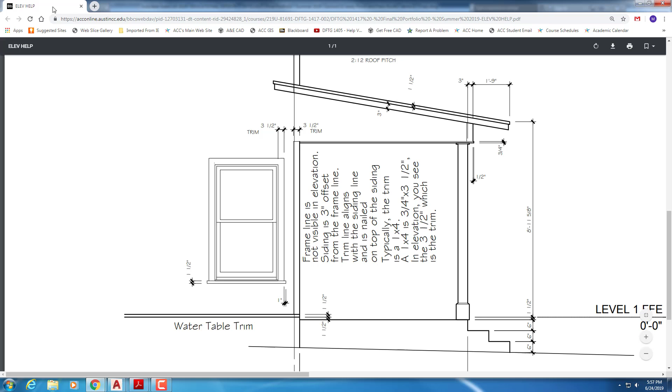The top of it is 1.5 inches. So the porch is 1.5 inches below, the top of the water table trim is 1.5 inches above. All right, so now let's actually draw that.

So instead of starting with the front, we're better off to start on the left side, west side elevation. And it's in this area here. So we're facing the direction, we're kind of drawing where the elevation slopes and all. So if we set this to A-ELEV-DARK,

and we'll set all these to by layer. All right, so from the edge, and this is just a construction line, from the edge of the column here out to, make sure my ortho's on, out to the face of the trim, it's going to be 2 feet.

All right, so we are at the 8'-11, and I think it was 5/8. So that's actually the line in that format thing that we use for the UCS. It's at that same height. So that's where the 2 and 12 would start.

So since the 2 and 12 is a ratio, basically start on top of the line here, come back 12 feet, and this just to construct the diagonal 2 feet up and then close it. That should give us a 2-12 slope. Yeah, X is 12, Y is 2, so that's good.

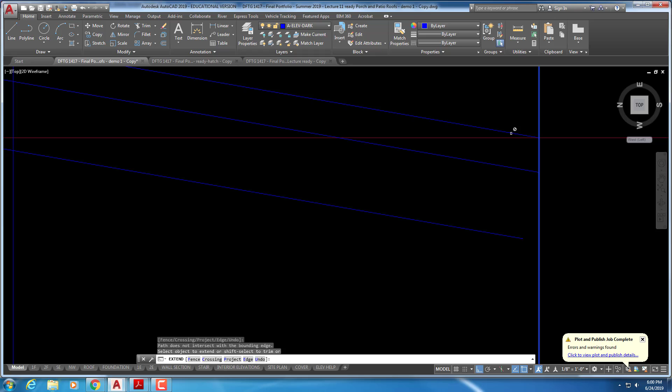So back here, since this is the one out here at the edge, these 4 should connect there, and that should already be connected, and then you would offset it 3/4 of an inch back, as usual, for the roof. And then you would trim that up.

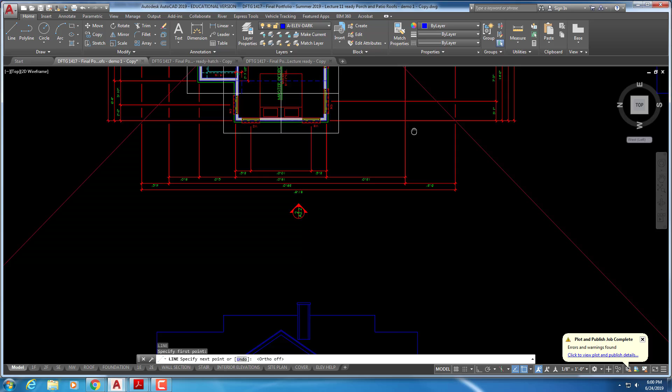Now on the other side, this goes a foot past the framing, but it's actually 1'-3" from the edge of the house, because we have 3 inches of siding out there. So if you project down from where that line went back on the roof plan, which is that foot back from the framing on the roof plan, that's where... can't see it, there it is.

That's where it ends. It's a foot back from the framing on the roof, but because the siding was 3 inches further out, it'll be 1'-3" here. And then we'll come back in another 3/4 of an inch to get the trim and the fascia board there. And then come back and fill it and clean those up. And then trim that.

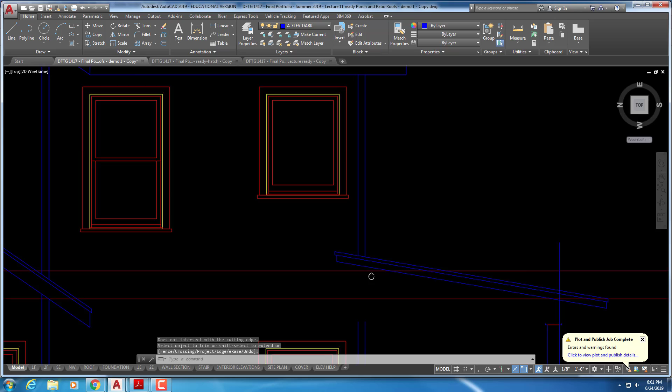Alright, and then this line is going to be trimmed back to the bottom side of the fascia, right on top of the column there, and again, the column sits 1.5 inches below finished floor. And so at the top of the column, right there, you're going to have the line coming across.

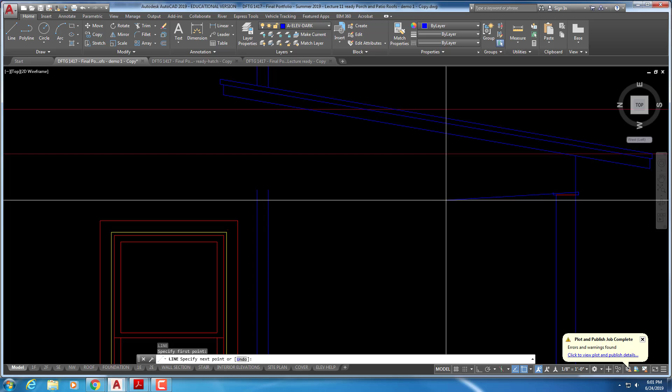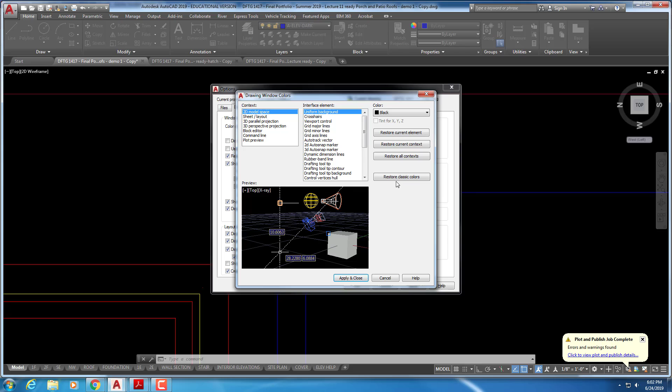I'm beginning to wonder if that's not a black screen. I want to check something real quick. It has nothing to do with what we're doing. I don't know if that made any difference or not.

All right, so start at the top of the column, come back across, and then offset it 3/4 of an inch up. That line's going to come to the back side of the 3.5 inch trim.

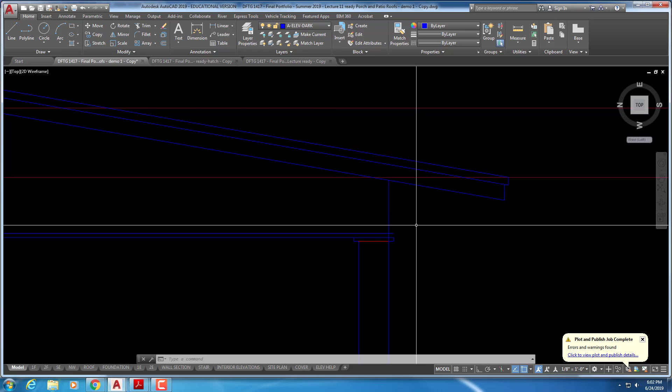So you would just fillet those together. So if this is running into the 3.5 inch trim, it's not going up any further. Over here, this is actually, according to the go-by diagram, coming past the top of the column there, and it's going out the 3 extra inches, like we did on the house for the siding.

This line stops at that 3/4 inch trim. But then at this point, it's showing that it's going 1/2 inch further out. Again, it would have made more sense at 3/4, but they used 1/2 inch, so we'll do that.

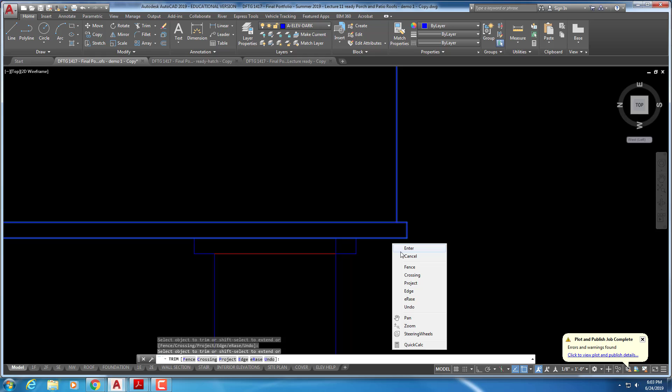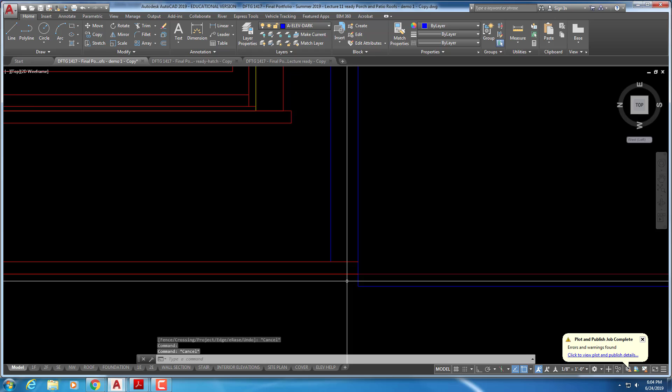And the water table trim, which you probably don't have drawn in, which is on the A elevation light layer, is the bottom of it's at finished floor and the top of it's 1.5 inches above, and the trim runs into it. So then that's that construction.

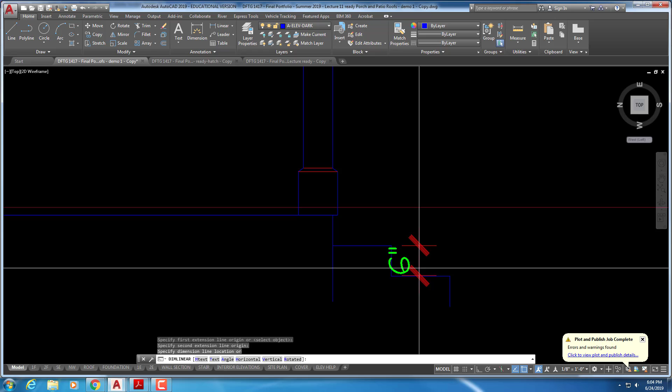As far as the steps go, they're going to be, according to the note on the floor plan, 12 inches deep each. So that means in line with the face of the column here, not with the trim around the column, but along with the face of the column, you're going to be 12 inches this way, and another 12 inches. So each one of those is a 12-inch offset. And then vertically from the top of the porch down, that's 6 inches each. So 6, 6, 6, and 12 and 12.

Now that that's been set up, we can start drawing the front porch.

All right, so the 2/12 roof is actually, because of the way of the overhang and it's so much more shallow, it actually ends up being higher than the 8/12 roof. But the basic setup, we just project their lines around to get the heights.

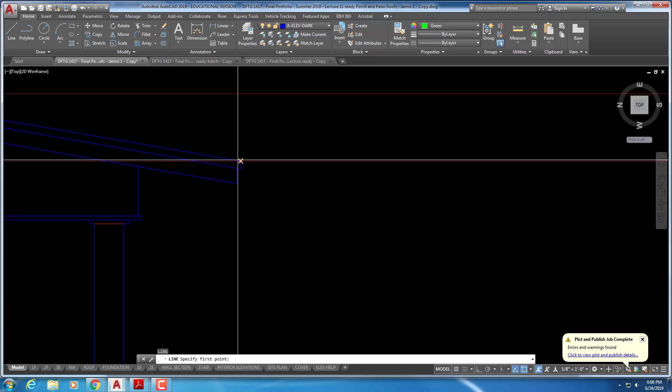I'm going to change the color here so you can see it better. Not really green, should still be on the A elevation dark. So coming off, this is the top of that trim board. That's the bottom of the trim board. That's the bottom of the fascia.

You're also going to be seeing these lines back here, which is the board, the trim that's on top of the column there. And that line that I've got going through should have stopped - that line shouldn't be there, in other words.

Okay, so we're going to extend that around to the 45, where that crosses. And you can mirror this, you just have to be careful and make sure your ortho's on, popping off. Make sure your ortho's off and you're actually on the 45-degree line.

Okay, so now I'm going back to the front, which is the south elevation. This is the top of the 8/12 trim. The bottom of the fascia for the 2/12 is slightly above that. They're not supposed to match.

They don't match, so don't get confused by that. All right, and then we have an edge line on this side where that roof is. Let me turn my ortho back on. And we have an edge line on this side, which is that 7-inch overhang. So then we need to run this on across here.

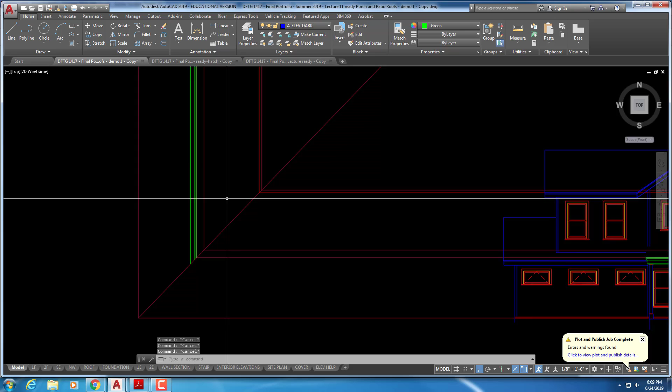this over here, you can see that those three lines are matching with the top three, and that is that board at the bottom. And then we've got this space here that you see from here to there, and that's what you're looking at in the front elevation.

All right, so then this roof goes up to some point over here, which we'll come back and finish that in a minute. And then on the other side, we do have a similar situation from the other side. So do the same thing we did over there.

Yeah, offset 3. Again, should be lining up with the siding that's already there. And you can erase your guideline, then come out another 1/2 inch from there. Which I've already got a blue line there. It's this line, which is already there.

All right, and then this would just be trimmed back to there. That would do that. And then up above, this is the edge of the roof over here. So that would be doing that.

And then this will come back to 3/4 of an inch. So you trim on your fascia board, you're 3/4 of an inch back. This is at 3 inches over, and that's that 1/2 inch out.

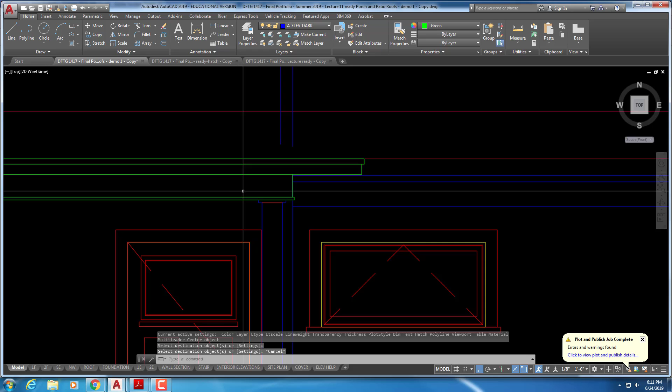Now remember, this is on elevation dark, so it should actually be blue. It's just easier for you to see when it's in green. Okay, so how far does this come back, and where does this wall occur over here?

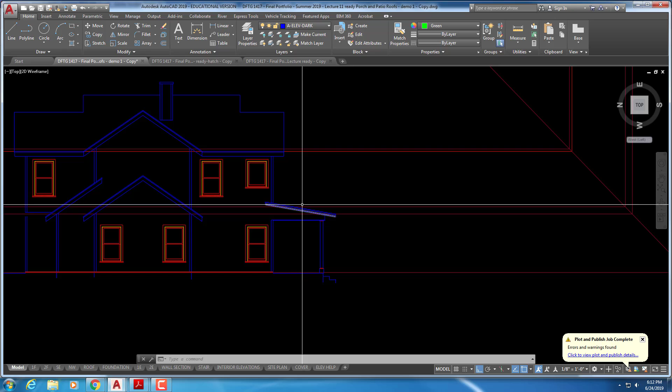Well, if we go back to the west elevation—I must have hit the wrong one. That's not the one I wanted. Oh, I'm going to the wrong one. This is where we need to be, in the west elevation. So this is how far it wraps the wall to that point. This is where it hits the wall.

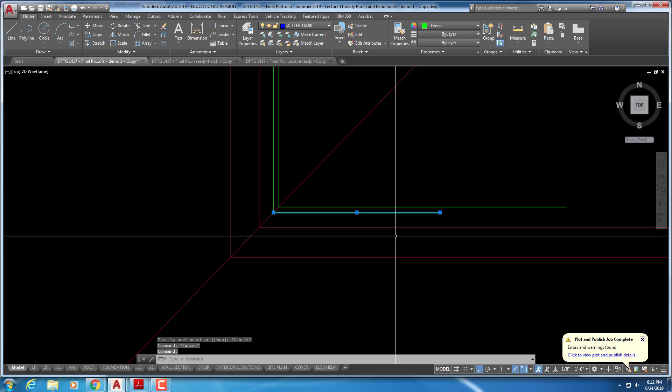So extend those over. Go back to the front elevation. South elevation. You could mirror, or you could just do a line and extend it. I think I'm just going to draw a line this time. All right, so this is the lower one, so that's the one that's going to hit the wall over here.

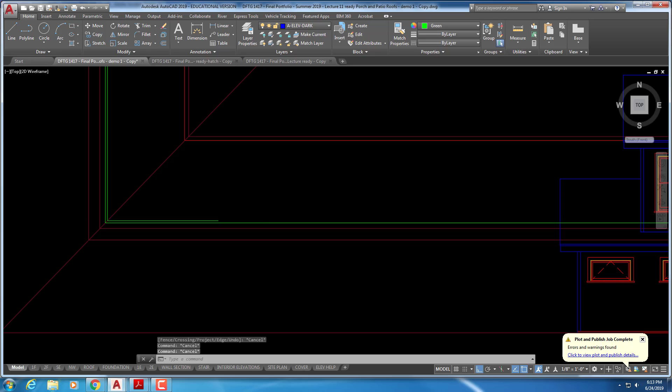Mine's in the right place because I basically worked backward when I deleted some stuff off this elevation, but you may have to extend or trim this trim line here. That's where that occurs, and then this upper line here where it wraps around is going to be there. So then you would clean that up to where this is wrapping the wall, and the wall is there.

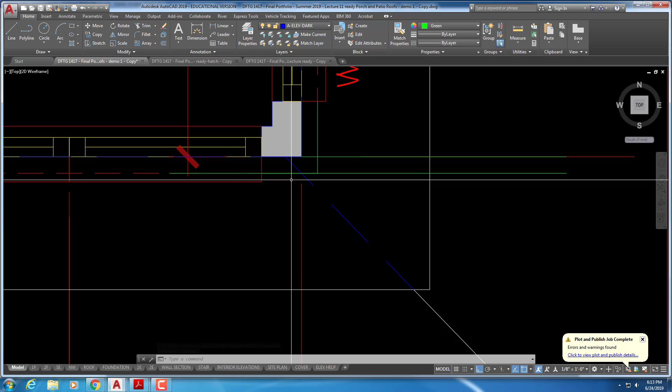On the other side, it's not quite like that because we actually have a hip on the roof plan, and it actually is showing where it hits the siding there, rather than typically you project off the roof plan itself. But in this particular case, because we hit the siding before we ever hit the framing, that's what you see, that's where we need to project from. So that's where the roof line hits the siding. It comes down and hits there.

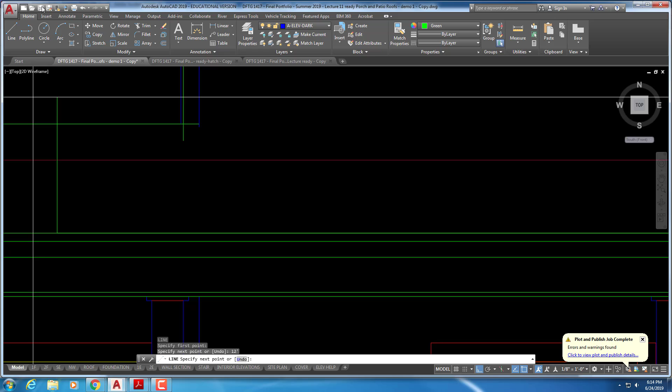And then we have a 2 and 12 roof again. So to construct that, remember it's 12 feet over, and then 2 feet up, and then close it. And then you erase your construction lines.

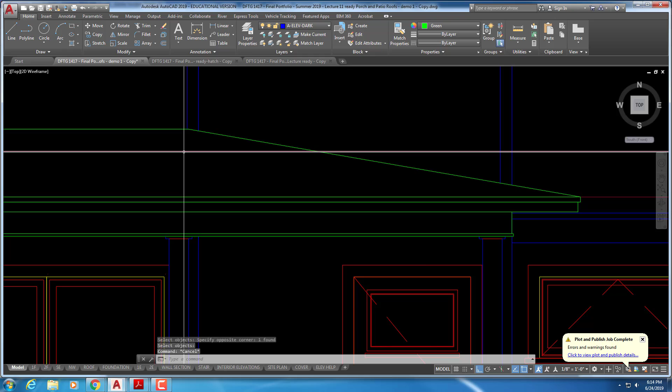And it actually does hit to that side of the trim. For it to hit right at the trim, it would have to be in the same dimension in both directions, and it's not. One's 8 and one's 8'3". So it actually hits to the inside, both on the roof plan in here.

So don't really need to draw this line, but just so this would be that 2-12 roof on the front.

Remember that this trim and the fascia board, you've actually got a small gap between the top of the trim at the 8-12 and the bottom of the fascia at the 2-12. The two roofs are two different things. So this is out in front of the other roof, so it is actually a little bit higher.

Once you've done that, then you can move on to the east side and draw the porch roofs on that side.

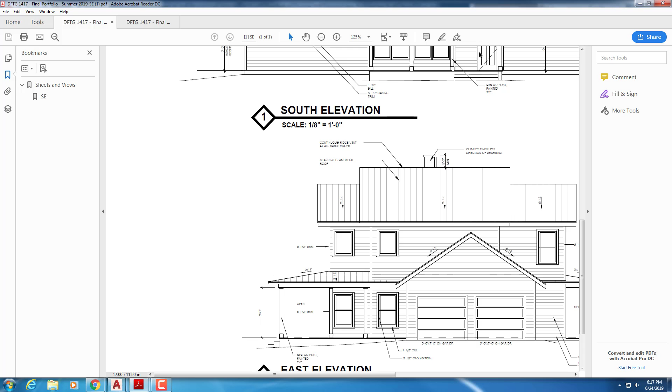Okay, so back to AutoCAD. Alright, so first thing we might do, just to make things easier, since we've already got this constructed here, I'm going to mirror this roof.

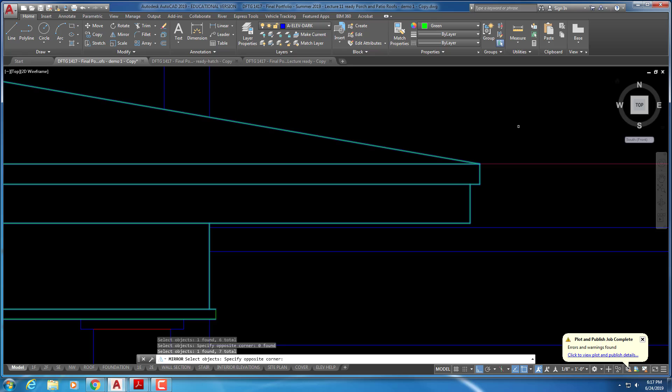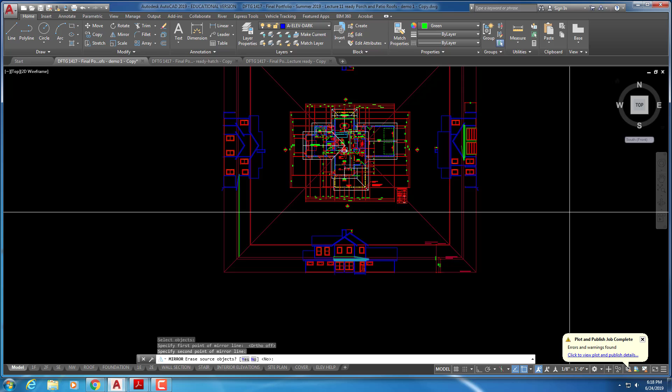Make sure I didn't pick up any extra lines there. Alright, again, you can't have ortho on to do this. You'll have to turn ortho off, and you've got to make sure you're on the 45-degree line. I'm not sure I ever pressed mirror. Maybe I did. Yeah, okay. Alright, I've got it there, but obviously I lost it because I hit escape. Let's try again. Mirror. If you hit P sometimes for previous, it'll pick up the same lines. So 45-degree line. Erase source objects should be no.

Alright, so now I should be able to go to this elevation. Now that does not put it in the right place, but it should have put it at the right height. Alright, so we come over here. This is the actual edge of the porch line over here, the porch roof. So put it way back inside because the porch is located on the front. So we need to take this and move it, and I missed the line apparently.

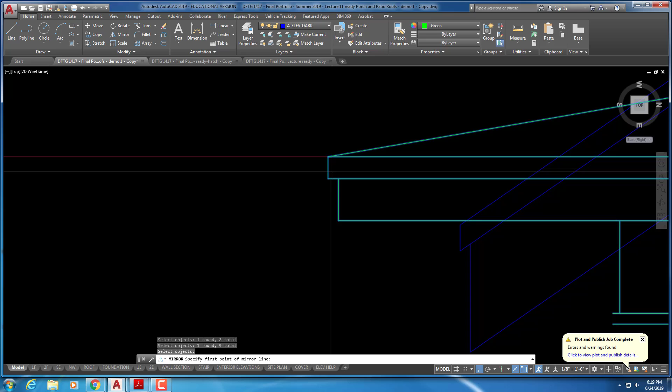So we need to take all this from that intersection and move it over. No, I don't want to mirror it. Let's see—move previous. There we go.

Right there, because that's the one that's aligning with the edge of the porch up here.

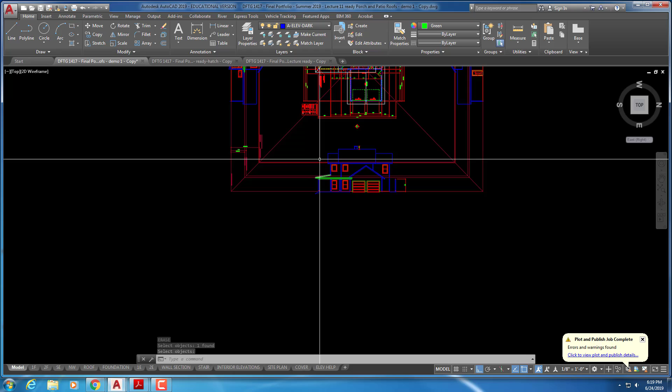So we discussed that this part of it's going to come back, and because of what the plan does there, see this roof comes back and this beam runs into that wall, so it stops right there at the siding. So we'll trim that back.

This part of the roof comes over the top of the 812, so we'll trim it back to the roof there. And then that leaves us with determining where it hits the wall.

This is going to hit where it hits here, where it hits the wall. That other line defined—you just project around like we did on the other side, where it hits the wall. And I believe that's the right place.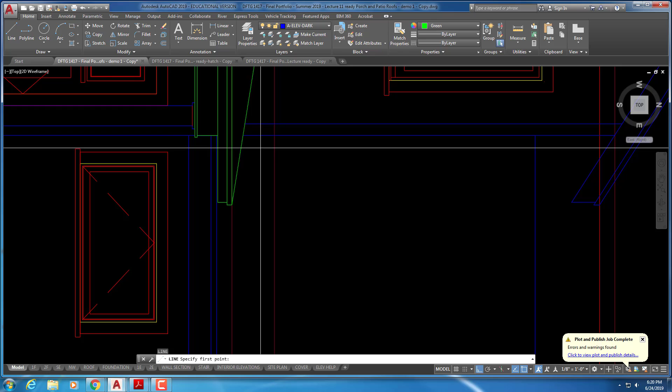Alright, so that's true back here. That's it, but there's actually another projection line as well. Okay, so that happens to be,

if you look at this roof, the one that we're showing there is the one that's beneath here, which is above the upper roof, which you can't really see unless you knew it was there, and it's only going from here back to there. The next part of it is over here. That roof's going from here all the way back to here.

So that's the difference. So there's actually two locations of where it hits the wall. There's the one where it hits it, where it's located here, and there's the one where it's located, where it hits there. And again, you should project those from where it hits the siding in both cases. So, alright, so that one.

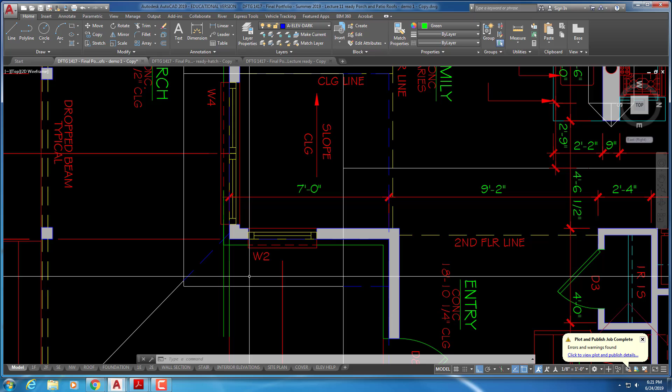Alright, we got to go back to the elevation itself. So this one is hitting here, which is the one back at where the door is. And this is the one that's out in front. This is where it hits it right here.

And it goes back to there to where it hits that, and then that's the smaller roof. Alright, so these do not fit together. That's because, remember, this roof wraps the other wall the other direction.

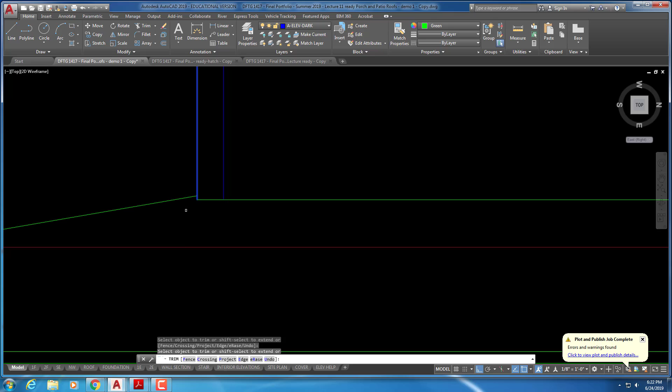So what's actually happening is there, it gets a little higher on that side. It continues on up slightly, but this is where it hits the wall. And then it drops over here, and that's where the end of the roof is, so it would continue on across to there. And I left out a line here, forgot to pick it up when I mirrored it.

So the roof here is basically doing that, and the trim on the fascia there. You don't really need to draw those last couple of lines because the blue line will take care of it, since it's a heavier line anyway.

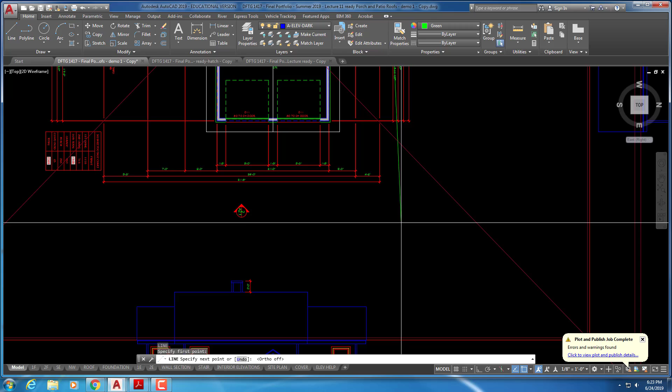And then on the back, we again have a similar condition because we have a hipped roof back there as well, which is going to start here. Turn my ortho back on. And that's the edge of the roof.

So what we might do is draw a temporary construction line from this point to that point, just to make it easier to mirror.

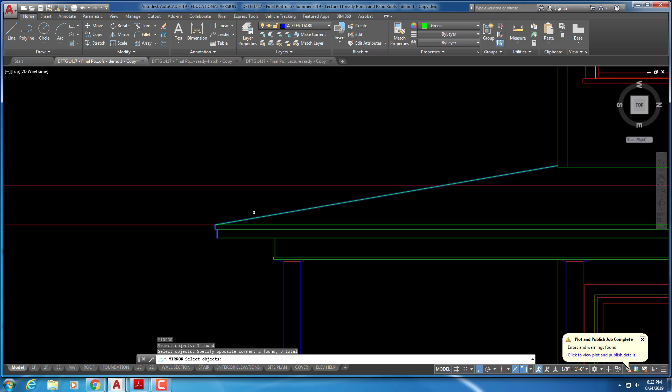So now I'm going to take that and mirror it off that line I just drew. Say no. Alright, apparently I didn't do that exactly right, but we can move it. Got the wrong midpoint apparently.

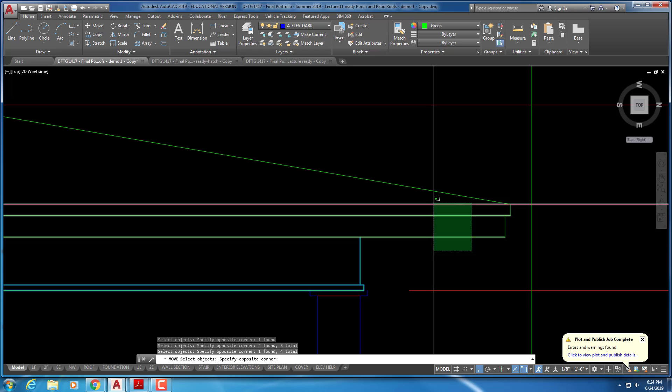I need to trim that line back. So, not sure how I missed that, but apparently I had another line there. The edge of the trim should be aligning with the edge of that, and it looks like I got rid of the line, so I'm going to have to copy that back.

Give me an intersection. Anyway, so the edge of the roof should be aligning with the edge of the roof on the roof plan as well.

Alright, just like on the other side, if you look at the plan, this roof here is coming up all the way to there, and then this one is a lower roof. So this one's actually wrapping around and going up further. This is the upper roof, but the lower roof is kind of wrapping this wall and coming back around.

Alright, so if that is the case, then this roof is stopping at there, and then it's wrapping around here, so we need to know where that hits the wall. We don't really know that till we draw it over here, but we do know that this is going to trim back to this roof.

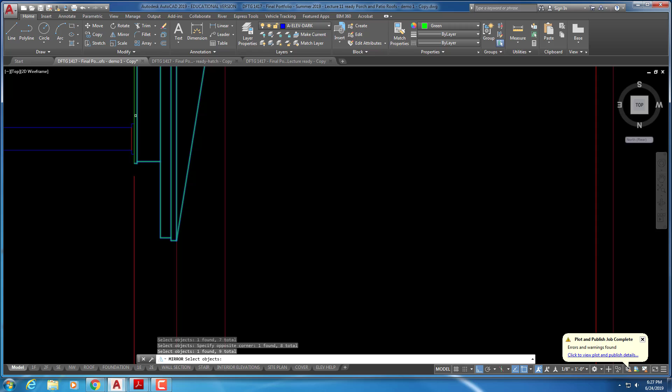Remember, you have to take your ortho off to do this. Make sure you're on the 45. Say no, so the other one stays. Obviously, it doesn't come in at the right place. We'll have to move it.

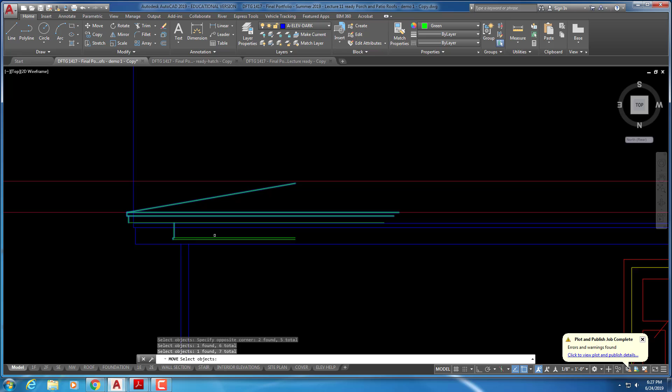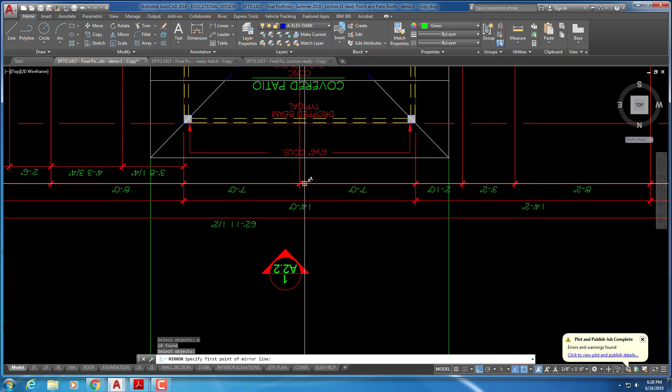And I'll go from that intersection, turn my ortho back on, move it over to where that roof projection was. We're going to have something similar on the other side, so we'll mirror previous off the midpoint of the roof there.

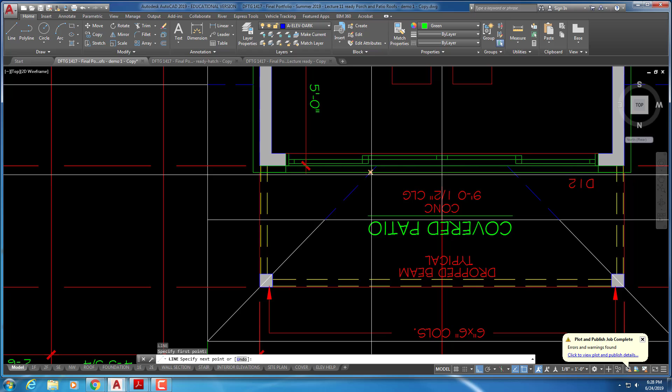So again, it aligns with the edge here. And then this does not come to a ridge line because it hits the wall before it ever does that. And it's going to hit the wall at the siding. So what we need to do is project where it hits the siding down.

It ends up being slightly below the second floor line. And then you might use J for join. And it'll join your lines so you don't have overlapping lines.

All right, now that we've drawn this in, I'm going to get rid of my construction lines here. Of course, these trim, 3.5-inch trim will come down and hit that roof. But this is where it hits the wall on that side, so we can project that back around now.

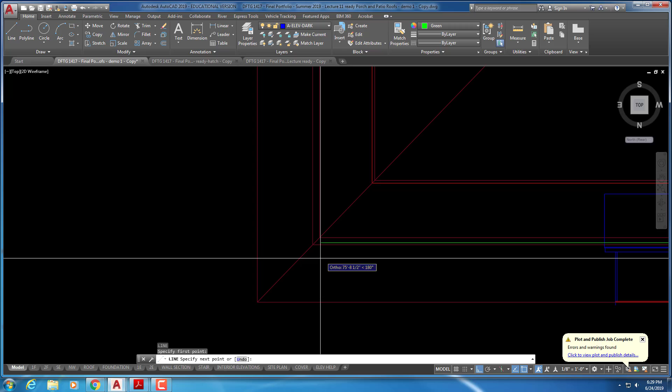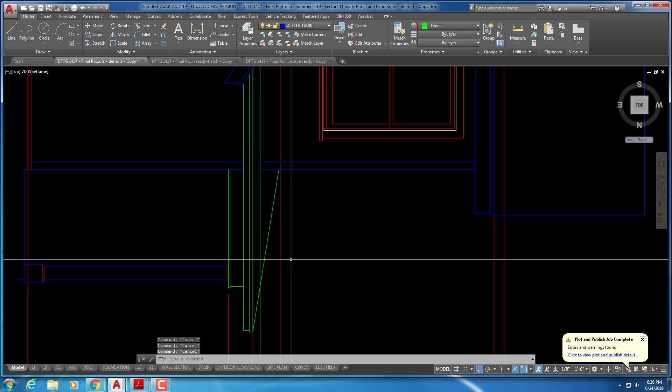And it runs back into that roof there because that's the way they decided to do it. And it stops at this wall, so that's where it wraps, but that's how you determine that height.

Which brings us back around to the same elevation we started with, but we still need to finish because we have the roof here that we need to add, which is very similar to the other side.

So if you drew it right here, which is on the opposite side of the house, and we'll assume it hits the wall at the same place. We'll have to double check. Mirror that back.

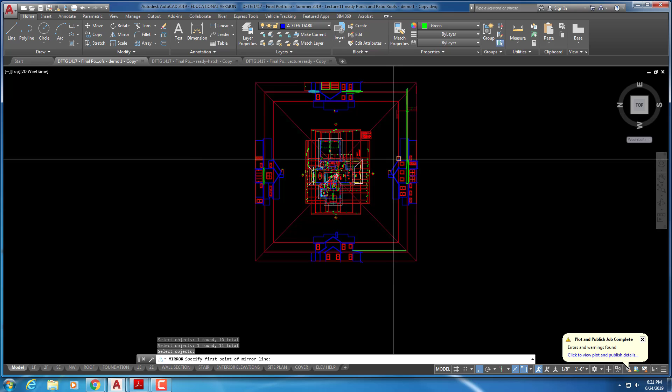At a midpoint. Make sure it's lining up with the plate height. Alright, so we need to project around from where it hits the wall here.

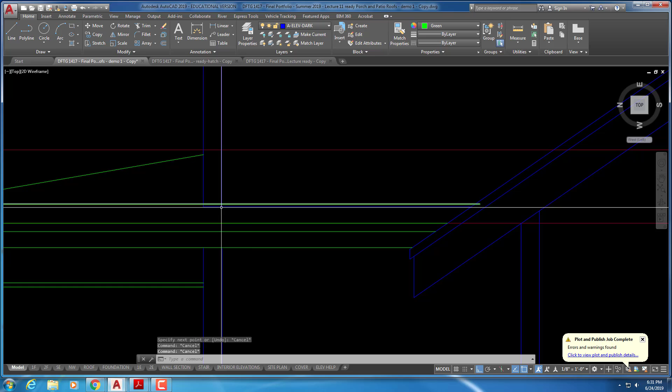Which would mean that's one of those roofs that just continue on back to the other roof here. And this of course stops at where the house wall is opposed to the porch.

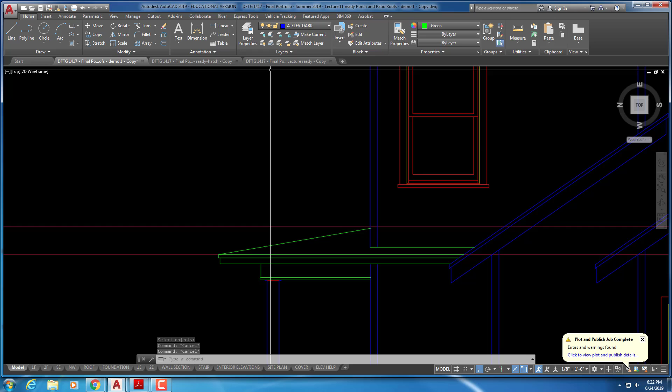And then all of those that I just drew in green here, except for one of the lines, belongs on the A elevation dark. Let's see, the one I was just looking at was this one, so

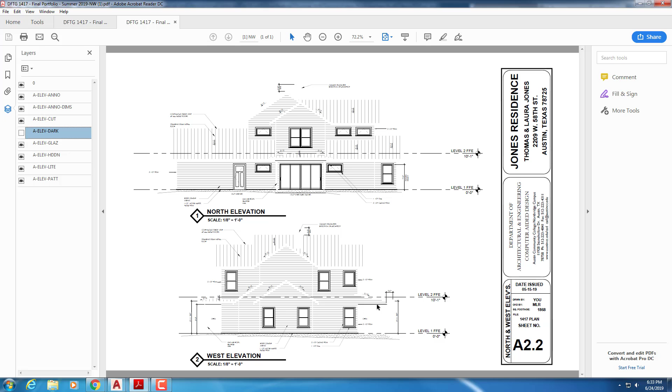That top line above that, can't see it, I can't tell. Get in a little closer. Yeah, that's really, I can see it. There's actually two lines there. That's a hatch line, that real thick line. It's not really thick when it prints, just in this PDF.

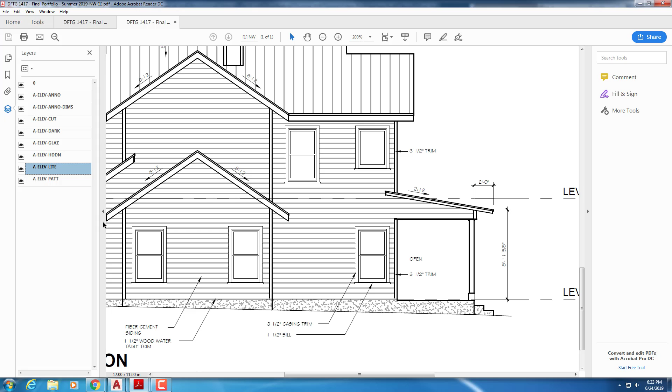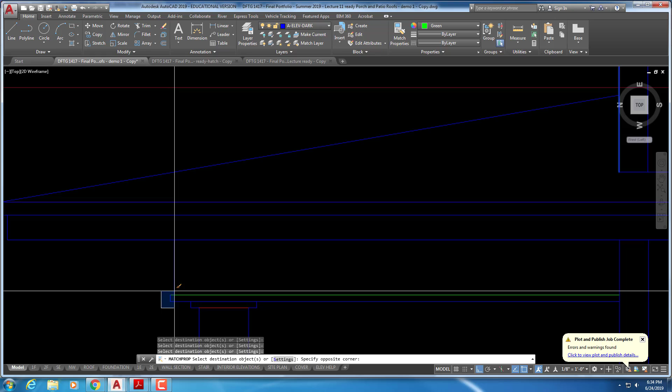So back in AutoCAD, all these lines including that one. And then the only one that's on elevation light is that one. So they should look like that.

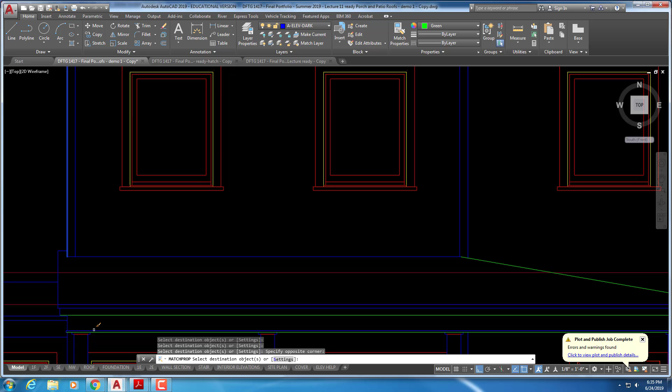Again, I just drew it in green because it's easier to see. Still belongs on the A elevation light layer, or dark, depending on what you're doing. This one, we're taking care of the trim. Not that one, this one.

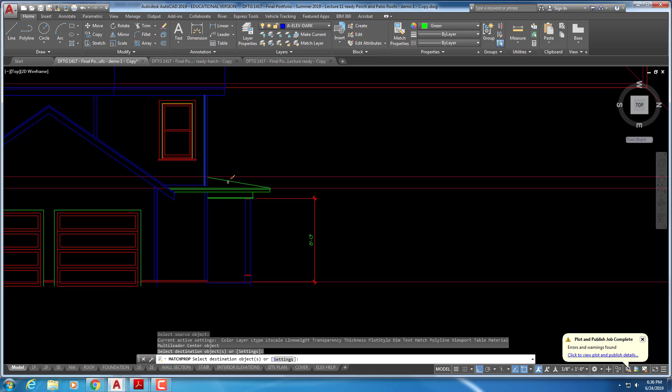That's not right. That should be blue.